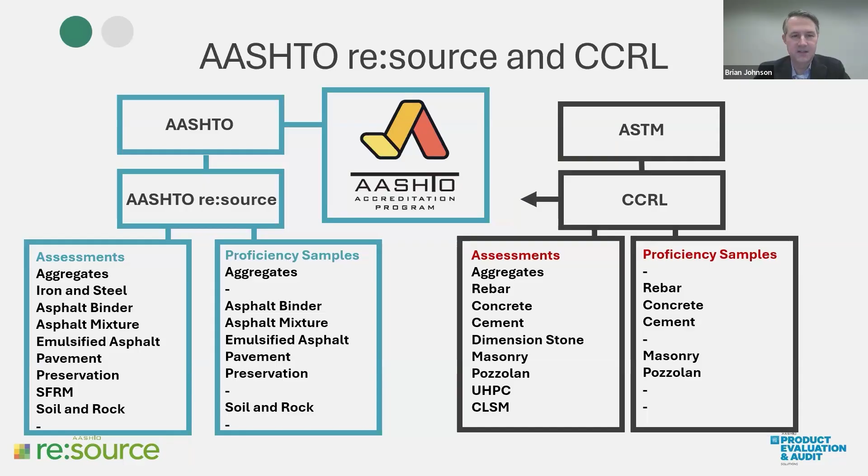Together, those assessments and proficiency samples come together, and on the AASHTO accreditation program, we deal with monitoring the accreditation status, reviewing corrective actions, and making sure proficiency sample results are satisfactory. If everybody can do everything they're supposed to do to satisfy the accreditation requirements, that will result in AASHTO accreditation. All right, let's get into the assessment scopes.

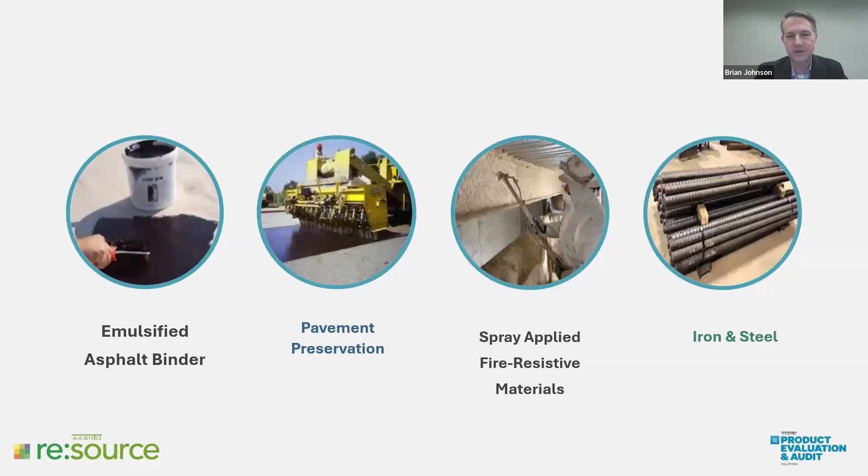I already touched on that briefly. But as you can see, we've got soil, aggregate, rock, asphalt mixtures, binders, emulsified asphalts, pavement preservation, chip seals and slurry seals, spray-applied fire-resistive materials, the SFRM, you can see that being applied right there, and iron and steel.

The assessment process is pretty simple. A laboratory that's interested in getting accredited will submit an application. We review the application and make sure that we can fulfill the requirements of the laboratory. We will then assign assessors and get them scheduled. We usually give laboratories about 4 weeks notice, so we don't perform a lot of surprise assessments. Then the assessors go on site and carry out the assessment.

The assessors, when they're done conducting the assessment, have a closeout meeting with the laboratory where they review the contents of the report. Then they will finalize the report. It goes through editing, it gets emailed to the laboratory contacts, and it gets uploaded onto the laboratory's page on AASHTO re:source's website.

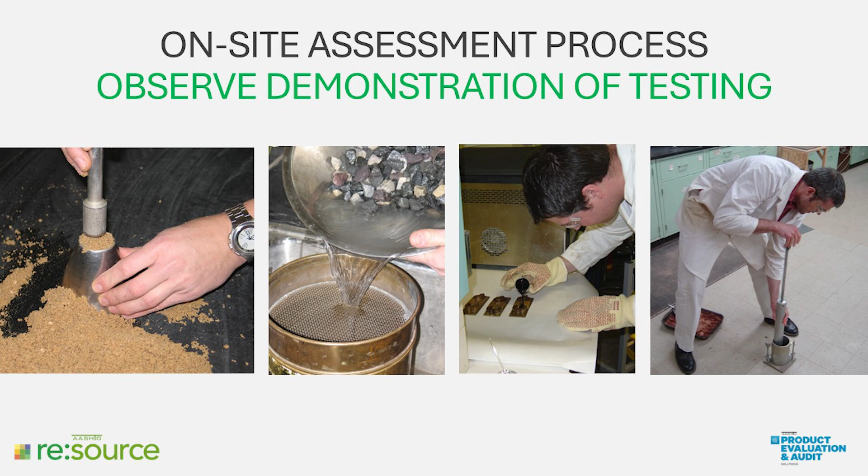Now, what goes on during the assessment? Really, a couple of different factors play into it. The big one that differentiates us from a lot of the other accreditation programs around the world is we actually watch a demonstration of the testing for all of the tests that are included in the on-site assessment. So we will actually watch them perform the tests on materials. And there's just an example of photos, those are kind of old photos, but they're photos of people running tests like what we would see during an assessment.

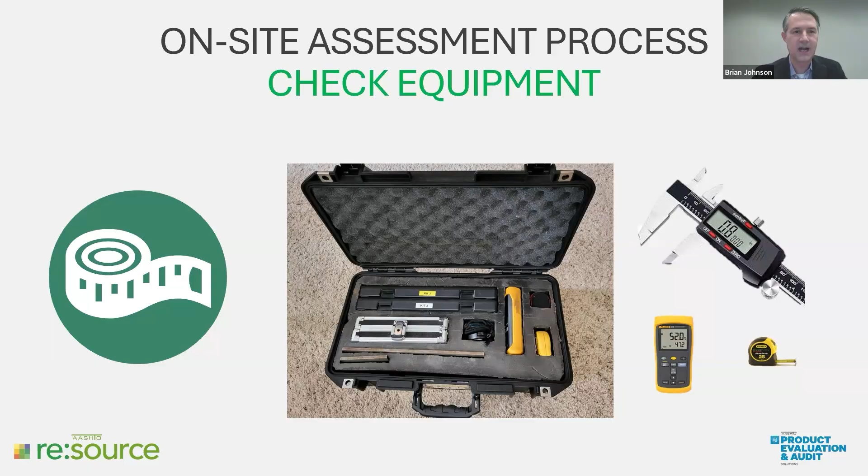We also check equipment. We don't check every piece of equipment. We check a sampling of equipment at the laboratory. Laboratories are generally doing their own checks or having calibrations performed on the testing equipment that they use. So our checks are more confirming that those have been done correctly. And not just that, but let's say that somebody uses a process that isn't quite right. We may uncover that during the assessment when we're checking it with our equipment.

And the third part is evaluation of the quality management system. We use AASHTO R18 as the basis for the AASHTO accreditation program. In addition to that, we will include different standards that laboratories would like to include in their scope of accreditation. This is most commonly ASTM standards that are similar to R18, but not exactly the same, like C1077, D3666, D3740, and E329. There are a few others that could be included as well, but those are the main ones.

These assessments include an evaluation of the policies and procedures that are used by the laboratory, and then we'll also look at the records that result from the implementation of that quality management system to make sure that the laboratory is doing things properly, in accordance with the standard requirements, in accordance with their own requirements that they've defined in their quality management system.

And we'll look for anything that might indicate some problems that they might not be aware of. Maybe some of the readings are not the right measurements that were recorded. That happens sometimes. Or maybe there were some improvements that could be made to the training program for the laboratory. Those kind of things can get uncovered during assessment as well, by looking at their policies, procedures, and then comparing them to their resulting records.

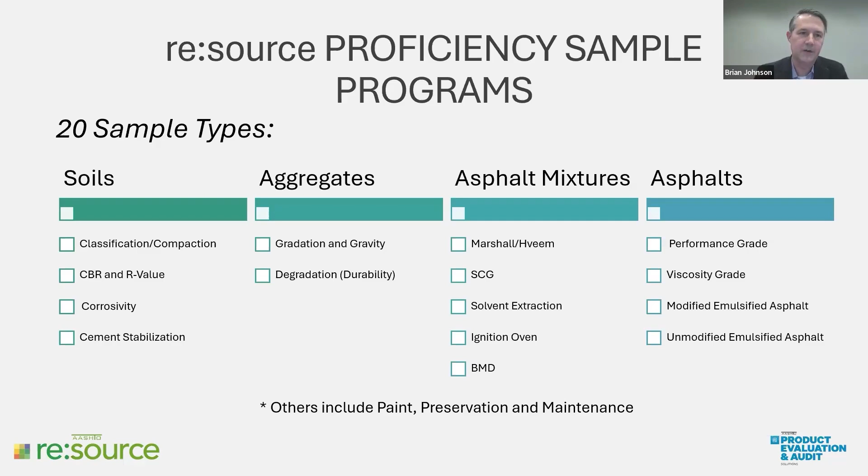Okay, the proficiency sample program, I mentioned that earlier. On the AASHTO re:source side, we've got 20 different sample types right now. These samples get prepared individually and sent out to the laboratories that are participating. There are often hundreds of laboratories in each sample round. Some are bigger than others. But as you can see, they cover a wide range of materials. And like I mentioned earlier, CCRL would cover the cement, concrete, pozzolan, masonry products that we wouldn't include, but they would all factor in the accreditation process.

For the proficiency sample program, this is a pretty painstaking process that our program director John goes through with his team, where they design these samples that are going to go out to the laboratories each year.

And in our office, we have a preparation and packaging area, kind of a warehouse area where these samples are prepared. They get shipped from here in Frederick, Maryland, sent out to all the laboratories. And then the laboratories have a certain amount of time to test those samples. Once they're done testing them, they enter them into our system. And then once the closing date occurs, all of the results are averaged and standard deviations are determined, ratings are issued, and laboratories get the reports on how they did.

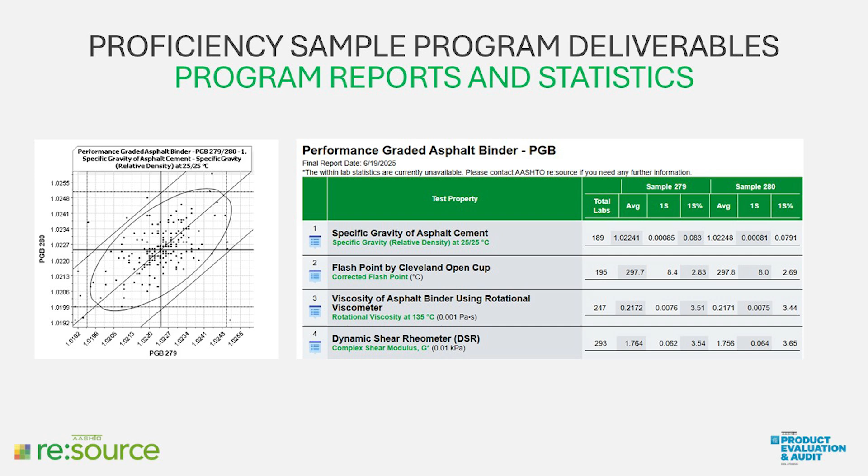So for every line item in a proficiency sample report, you can see the spread of data. So those points on the left represent the spread of all the participating laboratory data on that round for the two samples. They're all shipped out in pairs. And as you can see on the right side of the screen, we list the total labs that participated in the round, the average, what one standard deviation would be, and then the percent of their standard deviation that they had, which is what factors into the ratings that they ultimately get.

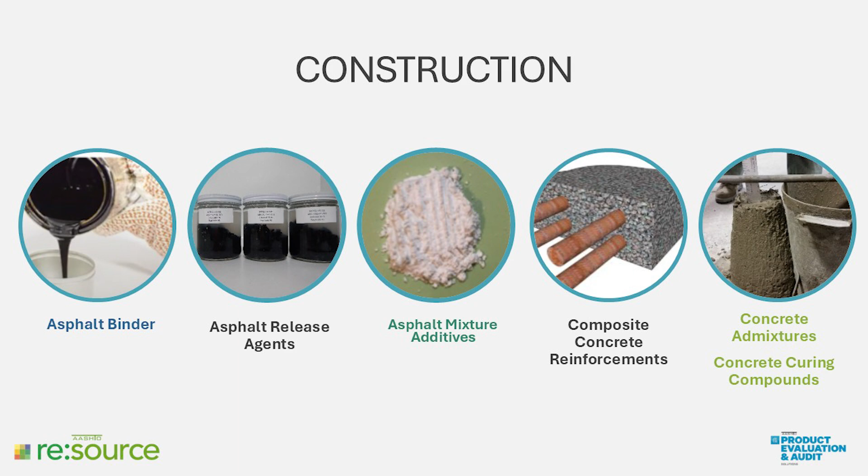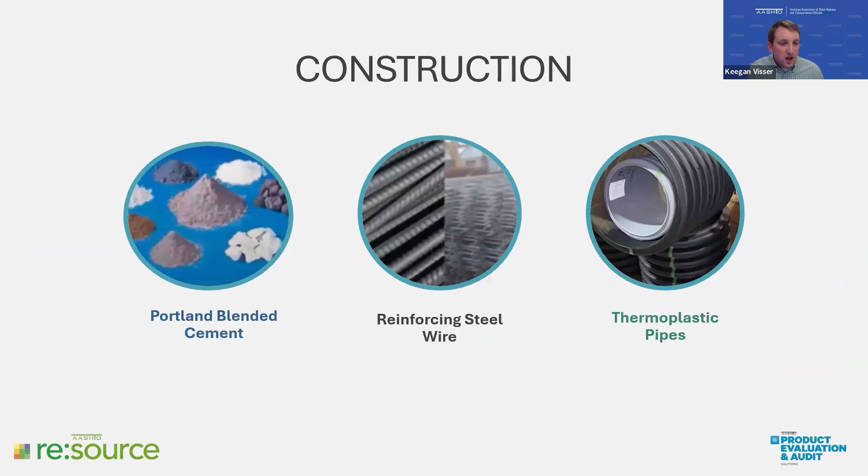So now we've focused on what the program is. I'll talk a little bit more about the product categories that we handle. They mainly fall into three different buckets. Construction, which is our asphalt binder, asphalt release agents, asphalt mixture additives, composite concrete reinforcements, concrete admixtures and concrete curing compounds, corrugated metal pipe, bridge bearing pads, epoxy resin binder, geotextiles, guardrail, guide rail, Portland blended cement, reinforcing steel and wire, and thermoplastic pipes.

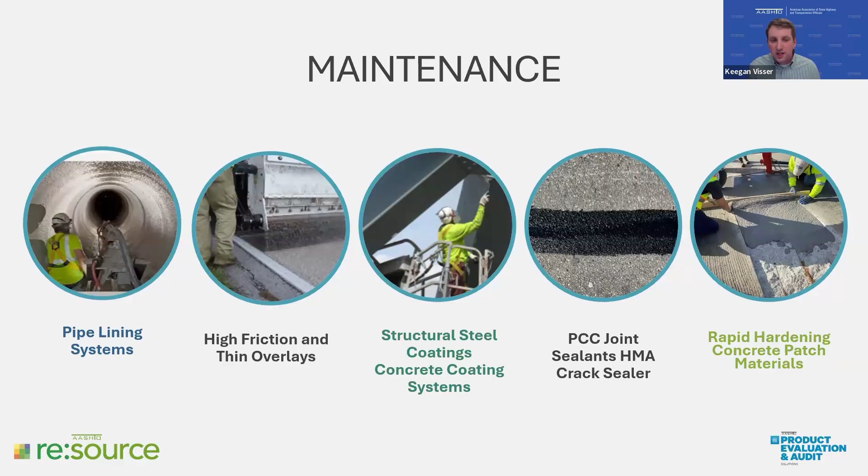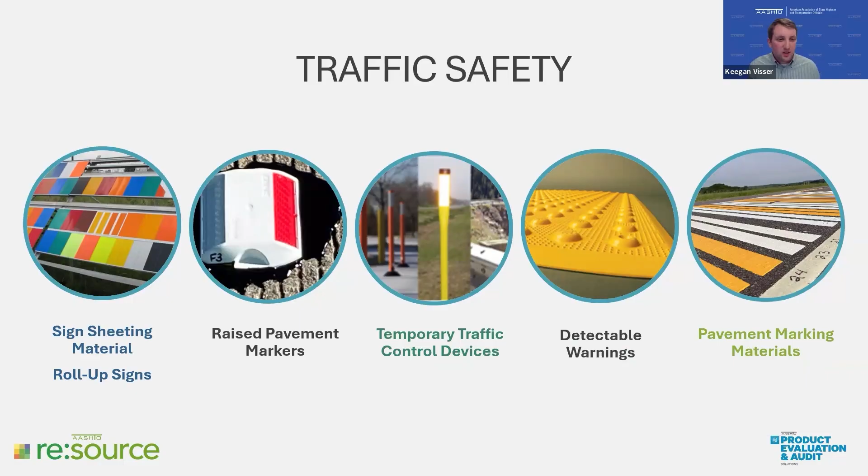We also have a bucket for maintenance type products, with programs for pipe lining systems, high friction and thin overlays, structural steel coatings, joint sealants and crack sealants, and rapid hardening concrete patch materials. And then finally, our traffic safety categories, which have our original programs of sign sheeting materials and pavement marking materials, along with raised pavement markers, temporary traffic control devices, and detectable warning systems.

So for the product evaluation side of things, the process is that manufacturers will submit an application for their product to the program through our DataMine website. The applications are reviewed by an AASHTO staff member who makes sure that what the manufacturer submitted meets the work plan requirements for types of paperwork and information submitted. If that's all acceptable, we send it on to be assigned to our testing facility, which is either a private lab or a state DOT lab, because we contract with both.

The testing is performed in accordance with our work plans, and the data is uploaded to DataMine. It's provided for review to the manufacturers, who can choose whether they want to release it or withdraw it from the program. If they choose to release it, the data is made available to all our DataMine subscribers on the DataMine website. And for the deliverables of the evaluation programs, the testing is things like compositional analysis, accelerated performance testing, things like that.

So the data coming out of that is either output through numerical data directly available in Datamine on the tables on each of the product pages, which are then searchable through the Datamine program. They can also be PDF reports, which also contain the evaluation data, or visual inspection and images for things like field testing or wear, stuff like that.

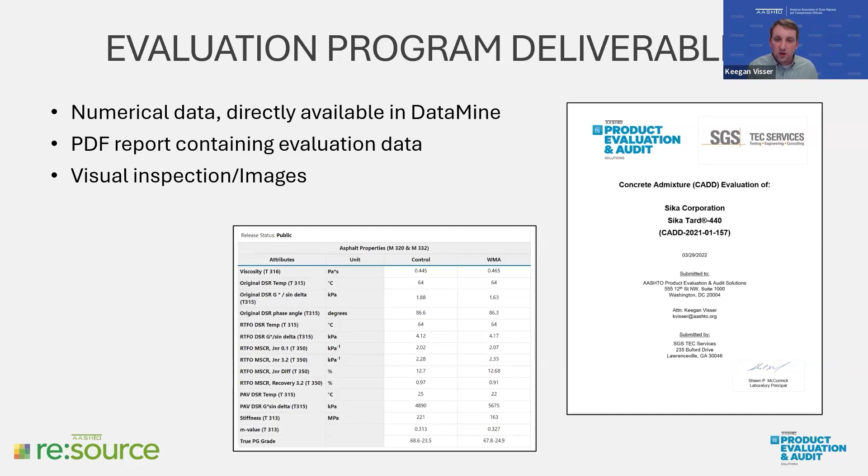And then to talk about the other side of the program, the audit side, I'm going to pass it back over to Vince. Thank you, Keegan.

So now we'll cover the audit program process under AASHTO Product Evaluation and Audit Solutions. First, the manufacturer will submit an application. Then the applications are reviewed and approved by a liaison. The liaison then has those audits assigned to an auditor. The audit is then conducted. Afterwards, the testing lab submits results to the auditor, and an audit report is then finalized and uploaded into Datamine. Data is made available to all applicable subscribers because we have varying subscriber levels.

All right, but now let's review some of the components of the audit. QMS review. This consists of verifying the QMS against the current SP01 and work plan requirements and ensure they include the corresponding documents and address all the required aspects. The facility audit itself is a review of the manufacturing process. It confirms the process is performed according to the QMS and relevant procedures, verifies the testing is performed according to applicable procedures, and takes samples for testing as needed.

Next, there's the document review. This verifies that the manufacturer has the corresponding methods and specifications, verifies completion of equipment verification, calibration, or standardization against SP01 and QMS, and verifies training and competency records, reviewing the traceability records. And lastly, there's the audit report. This includes all the findings in a report that is uploaded into Datamine. This includes corrective action reports when applicable, along with any testing results performed on samples for comparison or compliance review.

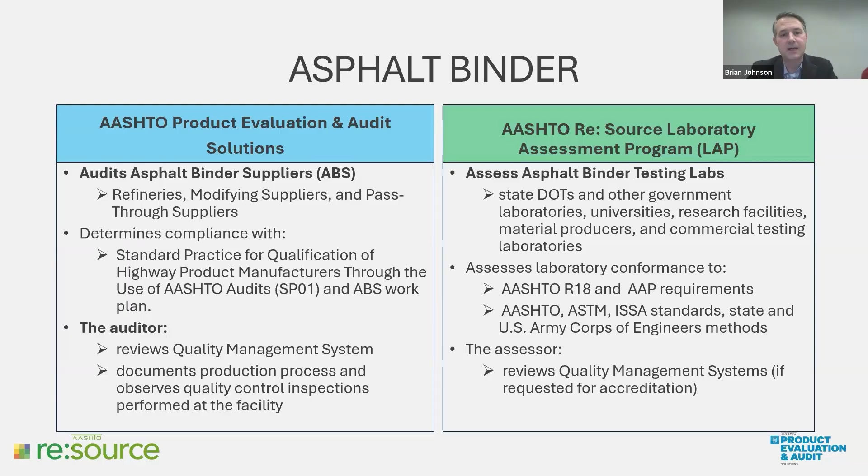Under the AASHTO Product Evaluation Audit Solutions Program, the auditor reviews random records for traceability, training, competency evaluations, inspection equipment records, internal audits, and management reviews conducted by the supplier. They also confirm if the supplier's testing lab is AASHTO accredited for asphalt binder testing. This identifies required corrective actions and observations found during the audit and confirms completion of the corrective action report and the implementation of any corrective actions from a previous year.

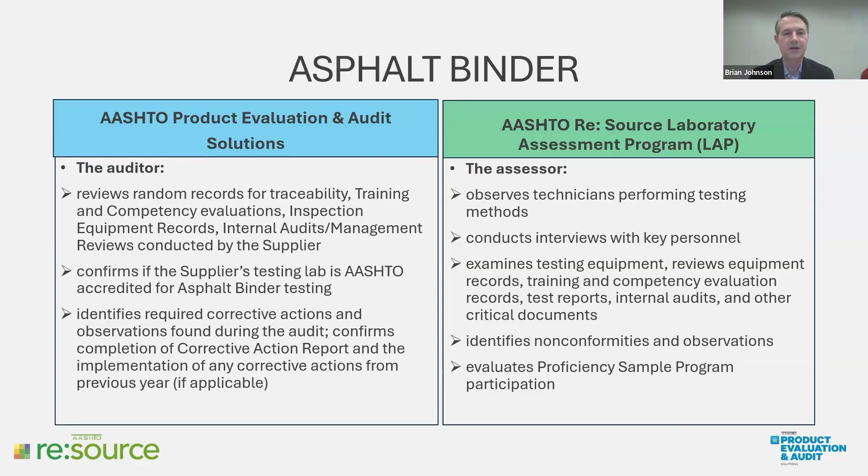Yeah, there are some similarities to note there because the R18 includes quite a few of those bullet points that Vince first talked about. But the assessor is also going to be watching testing, talking to key personnel that are involved in the implementation of the quality management system, reviewing records, policies, procedures, equipment. They identify nonconformities and observations in the reports, like we showed earlier, and they're looking at proficiency sample participation.

Under AASHTO Product Evaluation Audit Solutions, for the frequency of the audit, there's an initial audit to begin with, and then an annual audit thereafter. Every 5 years, including the initial audit, there's a desktop review and quality system manual review. The deliverables available to AASHTO members and the audited supplier through the DataMine interface include the audit report, the compliance authentication, and the corrective action reports, and any other reports that may be specific to that technical committee program, this one specifically asphalt binder. There will be monthly summary reports, and those would also be available to the AASHTO members as well as the audited supplier.

Now, our assessment staff targets a 27-month interval between assessments. So it's not every year. Right now, I can't remember where we're at, but we're a bit over 27 months as we've been recovering from the time that we were dealing with COVID. But we're honing in on that 27-month interval. Like we talked about earlier, the deliverable for the assessment team is the assessment report. One note, participation in the ABS proficiency sample program is required for AASHTO R18 accreditation. That's the asphalt binder. Yeah.

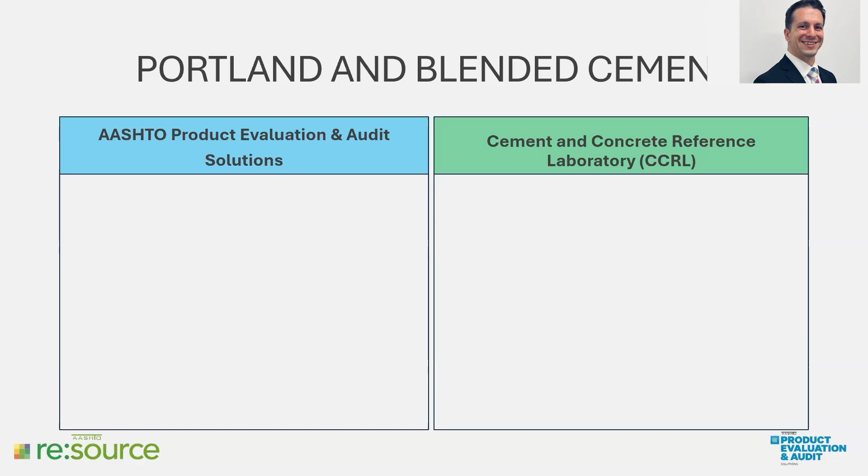And now we'll cover the differences when it comes to Portland and blended cement. Under the AASHTO Product Evaluation Audit Solutions program, audits for Portland and blended cement suppliers cover mills and terminals, including ports of entry specifically. If you're interested, more of a definition of a port of entry can be found in the work plan.

The determination of compliance with standard practice of qualification of highway product manufacturers through the use of AASHTO audits, SP01, and the PBC work plan. And the auditor reviews the quality management system and confirms if the testing lab is CCRL inspected.

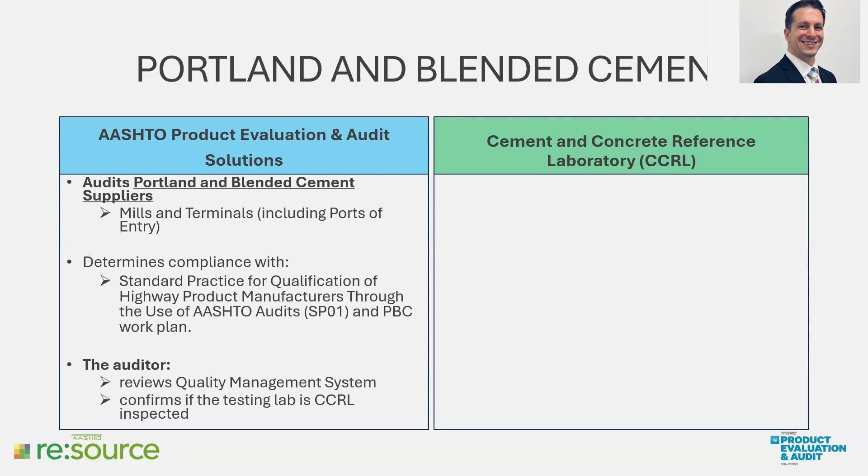Yeah, so like I said earlier, CCRL would cover this. So AASHTO Resource does not cover these assessments, but CCRL does. They call them inspections, but it's the same thing as an assessment. It's just the terminology they use. So CCRL is part of ASTM. They provide proficiency samples just like we do.

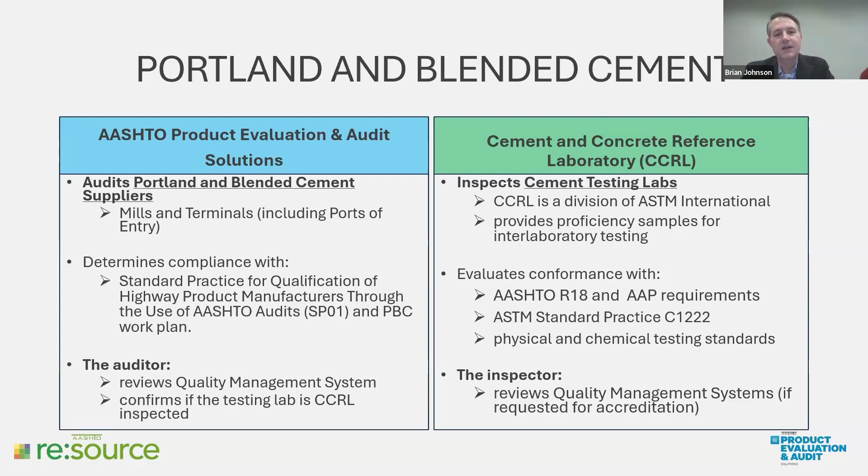And they're going to be evaluating conformance with, they use ASTM C1077 and actually for cement C1222 as the basis of their program. If the laboratory is going for accreditation, they'll also look at AASHTO R18 and the AASHTO accreditation program requirements. They look at physical testing and they look at chemical testing results if somebody's interested in getting accredited for chemical testing. The assessor will evaluate the quality management system, as I said before, for R18 if they're getting accredited. If they only need to be inspected, though, they're just going to look at C1222.

Under AASHTO Product Evaluation Audit Solutions, the auditor evaluates quality control inspection, documents the production process, and reviews random records for traceability, training and competency evaluations, equipment records, internal reviews, and management reviews.

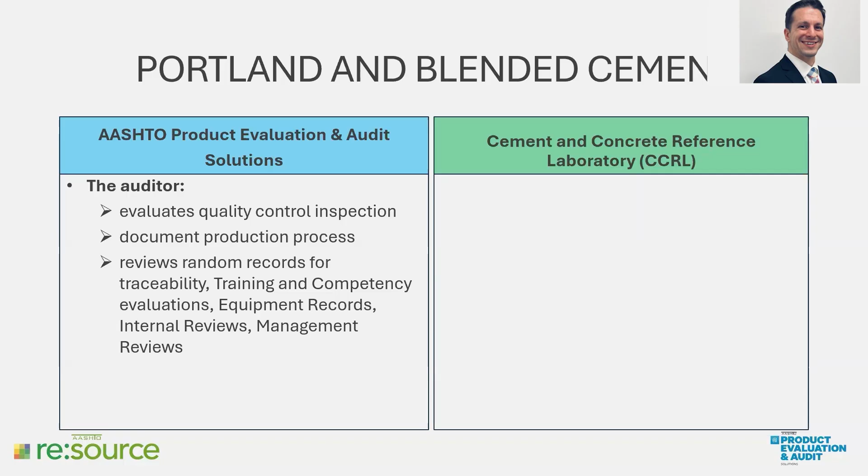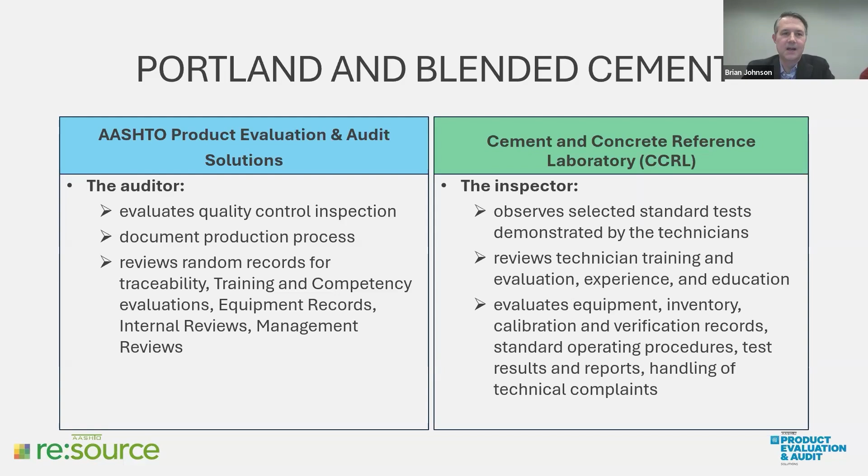Yeah, and the CCRL inspection should be pretty much like the AASHTO Resource assessment, where they're looking at the test that the laboratory requested, watching them run the test, they're checking the quality management system, policies, procedures, records, and everything that's defined in R18 and C1222.

Furthermore, under AASHTO Product Evaluation Audit Solutions, the auditor collects test comparison samples from mills. They collect physical and chemical properties, terminals, physical properties, and ports of entry, physical plus chemical properties if requested. The auditor identifies required corrective actions and documents observations found during the audit and confirms completion of the corrective action and implementation of any corrective actions from the previous year.

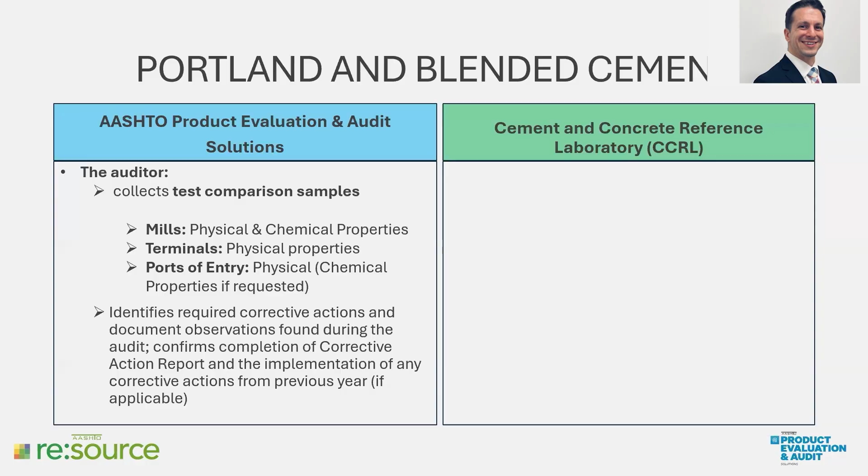Now, CCRL will not be taking any samples away from the laboratory, but they will be looking to see what the qualification testing was at the laboratory if they're getting accredited for chemical testing. They're also going to make sure that the laboratory has been successfully participating in the CCRL proficiency sample programs. And the way we require laboratories to participate in those, because they do offer Portland, blended, limestone cement samples, we just say, whatever that laboratory is normally testing, that's what they should get enrolled in. And that's what we would evaluate when we're looking at the accreditation requirements.

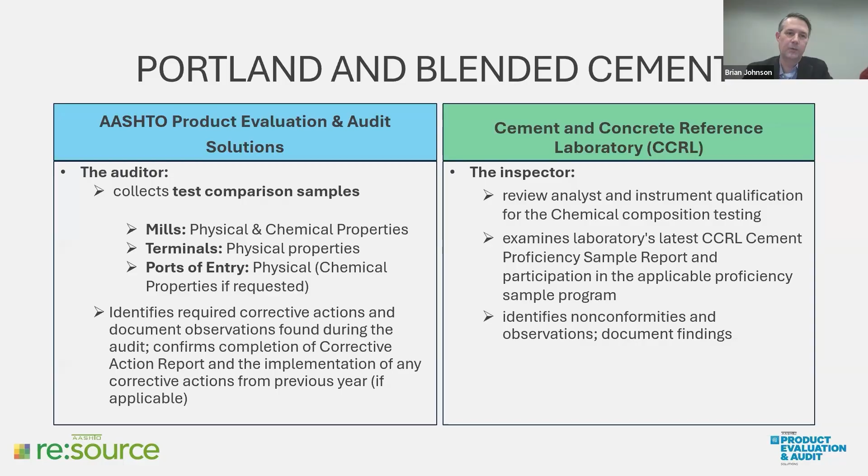And regarding the AASHTO Product Evaluation Audit Solutions frequency of the audits, just like ABS, we have the same with initial and annually thereafter. The desktop reviews, they're done every 5 years, including the initial. This includes quality system manual. And the deliverables available to AASHTO members and the audited supplier include audit report, compliance authentication, corrective actions, along with summary reports, also included in those deliverables available in the industry document repository as well as in the module.

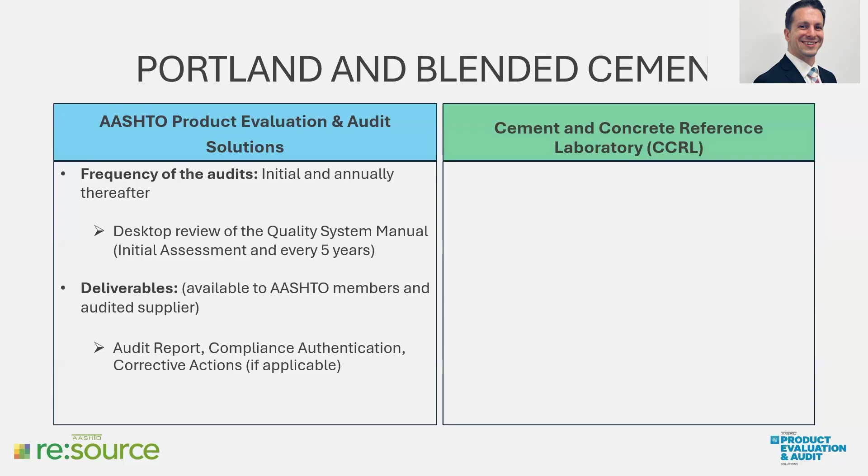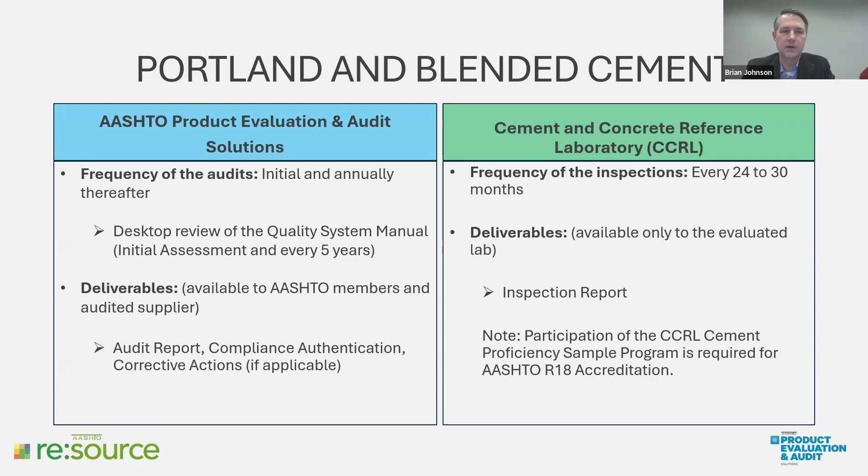And for CCRL, they're targeting that 24 to 30 month interval. For the DOTs, it's going to be the exact same as the AASHTO Resource interval now because we're doing those combined assessments. But for the private laboratories, it may vary depending on where they are on the tour. The deliverable is going to be that inspection report, which is, again, inspection and assessment are the same thing. And proficiency sample program requirements do fall into play with AASHTO R18 requirements and AASHTO accreditation policy requirements.

So there you have it, 2 AASHTO programs, 1 shared goal. Both AASHTO programs ensure consistency, integrity, and cost effectiveness through unbiased procedures while setting high standards to assess products, facilities, and laboratories across the transportation industry in support of a safe, reliable, and efficient system.